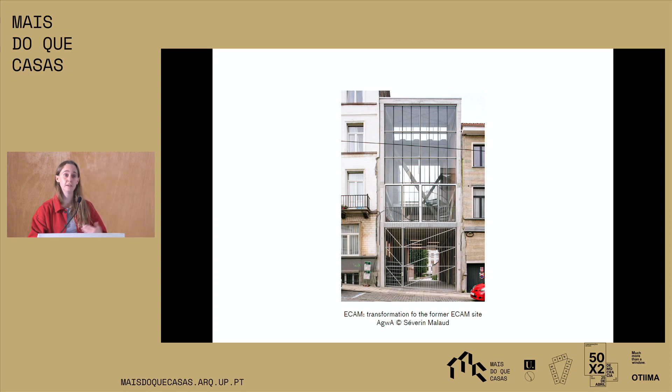Another theme is structure. We really enjoy thinking about structure, about intelligent structures. For this one, it's an old warehouse that we transformed into a house, and here the existing concrete structure had to be reinforced. We did a lot of going back and forth, but in the end we proposed to reinforce it with wood.

Which is a bit contradictory because wood is a light material and concrete is not, but in the end it works, and it gives this very architectural definition of the spaces. It defines the spaces really well, and it's always interesting to think about how the structure can also create the architecture of the space.

And then finally, CHAPEX, it's a very large scale project, our biggest one, these very large scale exposition halls in Charleroi, a city in the south of Belgium. And here for us, it's about use and appropriation, I think.

These kind of buildings are from the 70s, and they used to host big fairs in these buildings, but now they don't use them so much anymore, so the city is left with a huge building and they don't really know what to do with it.

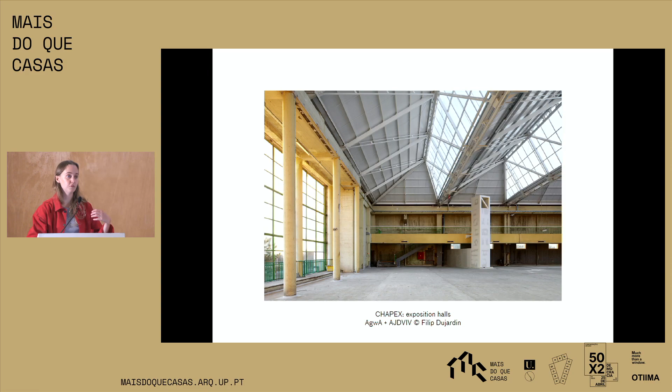So they actually asked us to demolish part of the building and construct this new passive volume that could be added to the existing building. But instead, we proposed to demolish not the building, but the facades of the building, so a part of the interior becomes an exterior space.

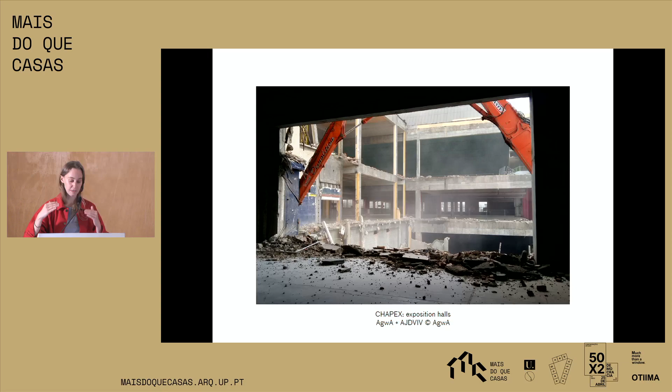Because in this way, the city that is close by can be connected with the inside of the building, and the topography can be adapted. Suddenly the interpretation of the space becomes completely different, creating new possibilities that weren't there before, but at the same time it says almost nothing has changed. If you look at the building, a lot of the original elements are still there. It's just by changing one thing that suddenly the building becomes very different.

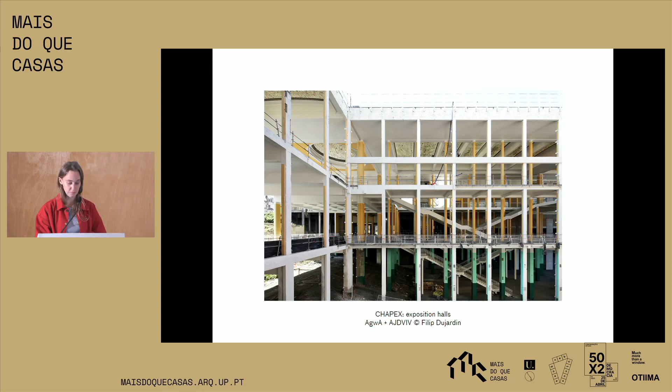As a last introduction, this is a competition we did with Muck Petzet from Germany. We lost it, but we still think the things we were talking about at the time have really been seeping through in our projects since then. The question was to create a sustainability campus for the universities in Brussels in a former military building.

The university, in the competition brief, gave us a historical analysis of the neoclassical buildings that had a lot of value and should be kept, etc. Then there were also a lot of postmodern buildings on site, and basically what they said is those are of less value and you can sort of do whatever you want, you can demolish them, etc.

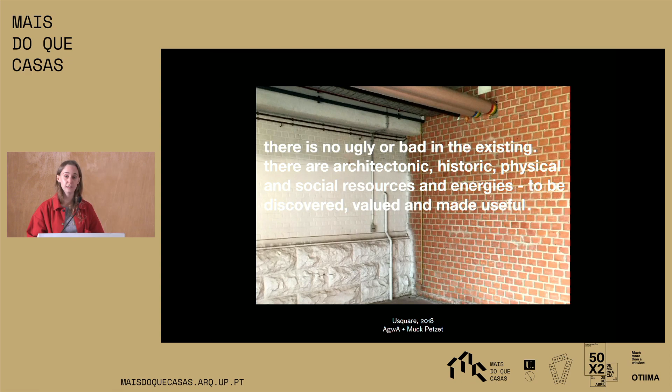During the conversations we had, we were thinking, if they want a sustainability campus, then what's really sustainable? Is it demolishing things and creating these new kind of super insulated, plastic-filled volumes? It's something we don't really adhere to, so we created these images as a sort of manifesto saying there is no ugly or bad, no good or bad in architecture, but the existing is what is there, and let's try to do something out of it and use these buildings to their full potential.

The client didn't agree.

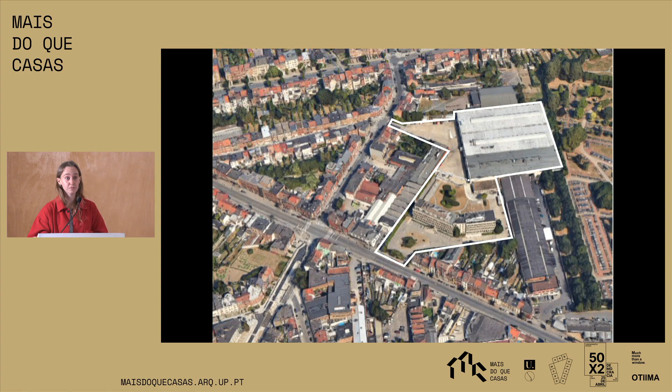So then comes the project, because it emerged out of an emergency. The municipalities that surround this site had a lot of growth in population, and they didn't have a secondary school that was French-speaking in their area, so they said we need to create a new secondary school in the municipality. They found the site of the office building, which was actually quite interesting for them, and so they started up a first competition phase, which we entered.

In this first phase, the idea was to try and open up a school on site as soon as possible, so everything had to go quickly, and it only concerned one of the wings — this one. The other one was left for the second phase. The idea was that the school could start up as soon as possible, while the construction site would be ongoing next to it.

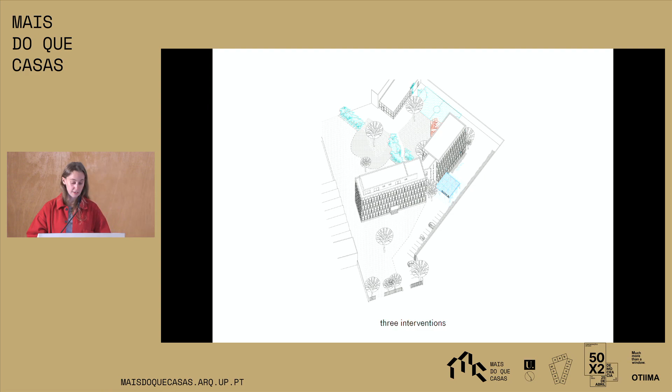So we had three interventions. The first was about the materials, the partition walls we saw in the photo. Because the quality was so high, we thought — a school doesn't have the same budget as the people who used the building before, so let's reuse these things. Also with the idea that this might be quicker, which in the end was absolutely not the case, but I still think the idea stays, we're still behind it. And so we reused all of these materials.

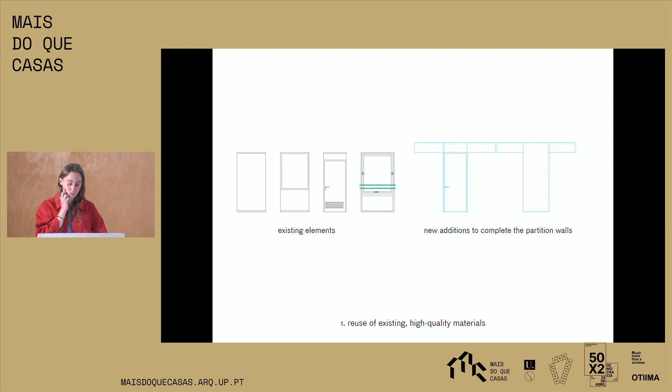Then we had to find a way to complete these partition walls, which we did using one kind of material — multiplex, wood like this — to mark where we left our traces. We made some sketches, and in color you can see the new elements we added. Everything in white is either existing or reused materials.

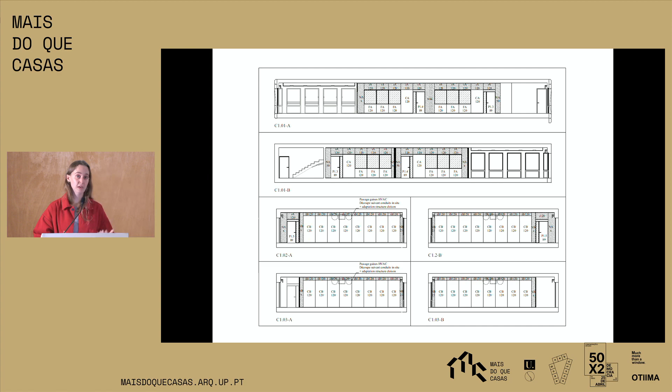And then, of course, you have to really do it. So then the work really begins — you have to measure everything, inventorize everything, be very precise, check if it's feasible. You have to take into account that when demounting, some elements might get broken, so you have to build in some safety measures.

Also for the contractor it's quite difficult, because they have to be really careful when demounting stuff. They have to stock everything, they have to inventorize everything. At some point during construction, they had a worker almost full-time moving stuff from one side to the other, because you need a lot of space to store this stuff.

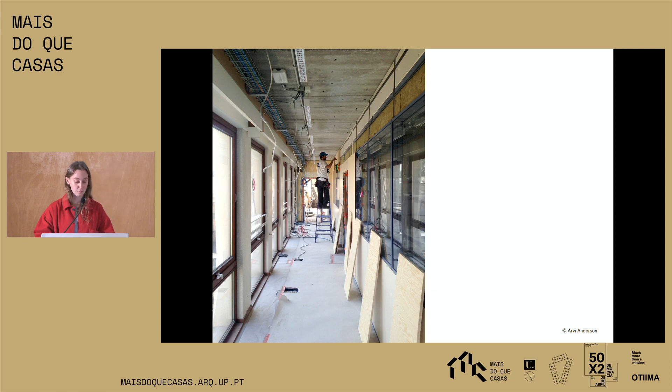So this photo from the construction site, you can see that instead of the central corridor that we used to have before, we decided to put the corridor on one side of the building. This way we suddenly have a really nice illuminated corridor, and on the other side we can create larger spaces that are more adapted to a school building.

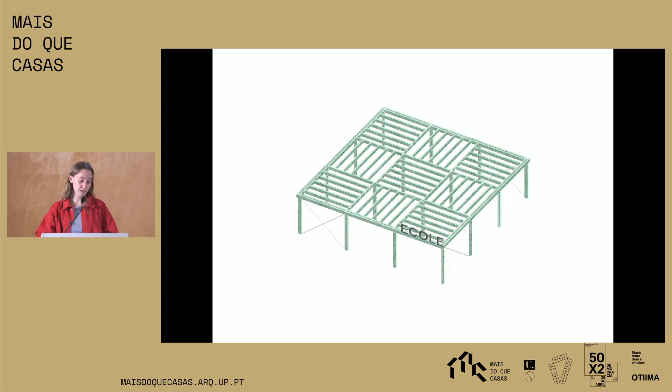And then the second intervention is a new entryway. The fact that we were only touching one of the wings of the building meant that we had to create a new entrance to the school and also mark this entrance so that it would be clear for everyone. We decided to use this really cheap hydrofuge wood because it's cheap and it's easily demountable, easy to build stuff with. In this first phase, we didn't know what was going to happen in the second phase.

It was an ideal solution to say, let's use a material which, if in the next phase this has to be adapted, can be easily taken down, used for something else, or built up somewhere else. So it's very flexible.

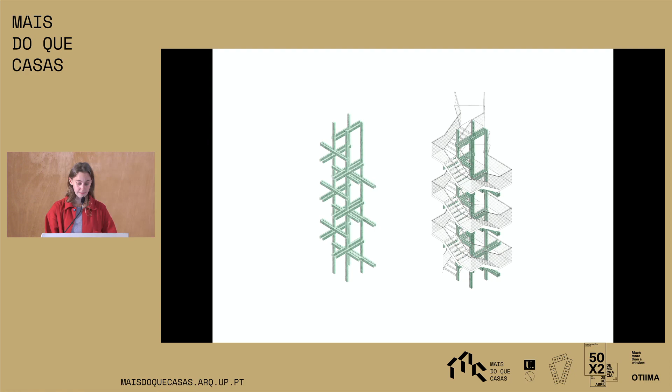And then the same thing for the staircase that you saw in the first photo. Also this cheap, demountable wood. This staircase was necessary as a fire safety measure.

Often these kind of staircases are really small, in a corner of a building, but here we decided to put it at a really important space in the school. It connects all of the corridors to the playground, and in this way it becomes this kind of central element in the building where all of the students can meet each other, and suddenly it gets a lot of value.

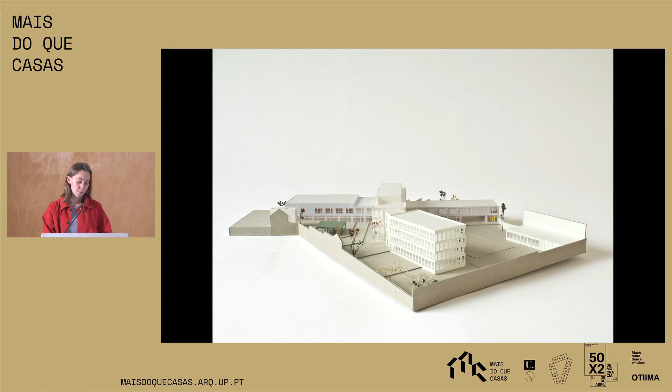And then at some point the second phase started. Another competition - we entered again and we won again. You can see in the front of the photo the wing that was treated in the first phase, and then the proposition in the back. There's a second existing wing, and then we proposed this elongated volume at the back of the photo.

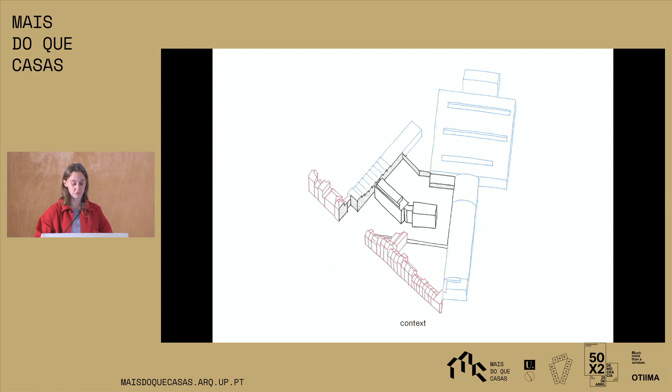So we proposed to create this volume going from the front of the plot up until the back of the plot, for a few different reasons: to activate this party wall, to keep as much open space as possible for the playground of the school, and to create some visibility to the streets, because the building was so far back from the street it was difficult to know what was happening there. By putting this volume there, it can suddenly create some visibility in the street.

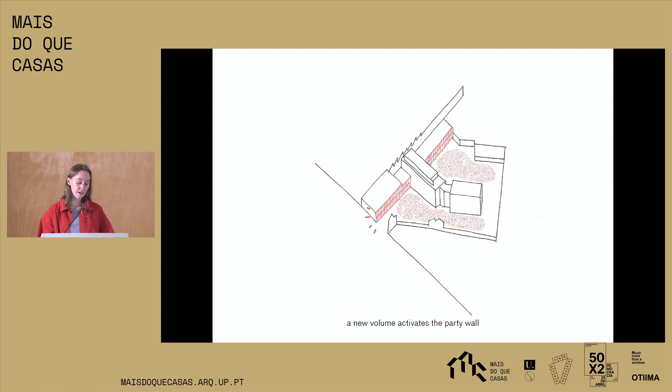Also, what we find super important is to create buildings that are readable, where people can easily orient themselves. So here as well, the volume was quite interesting to guide people to the main entrance of the building.

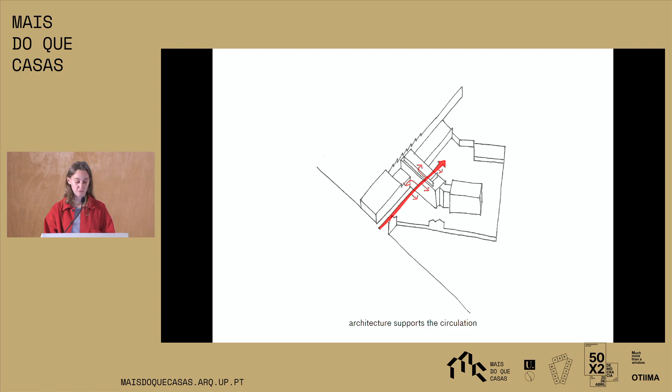And then lastly, one of the elements we had to integrate in the program was a sports hall. We put it at the front, on the street side, because this way we can separate the school and the sports hall very easily - during evenings, weekends, or holidays, the school can be closed but the sports hall can be open to the neighborhood, becoming this kind of social bonus given to the neighborhood.

The construction site took place when the school was on site, which was quite difficult.

So we had to think about this kind of musical chairs together with the school and the contractor, to see at some point the school would be there and the construction site would be somewhere else, and then it would switch and evolve. Also, because it was a new school, every year 100 new students arrived on site, so the school was growing bigger and bigger, but of course the construction site was also very important.

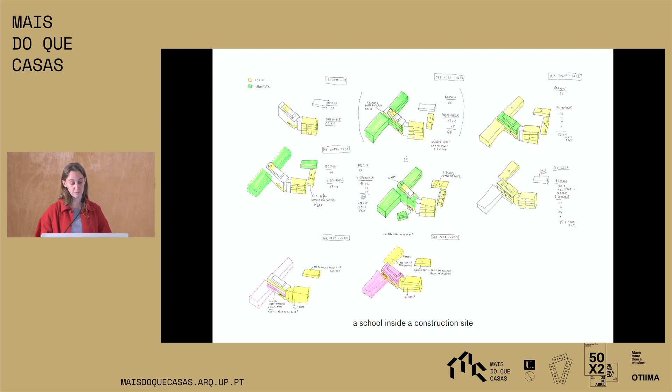In the end we managed. It was not easy for the school, but everyone made a lot of effort, and luckily it turned out really well. So an important factor was that everything had to be done as quickly as possible, as cheaply as possible, but quickness was really important.

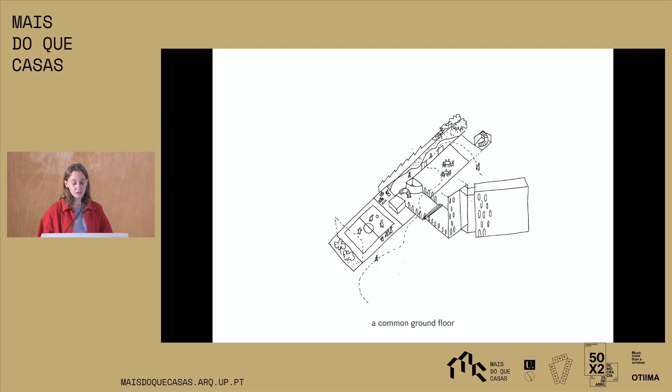So we had to think about important decisions to make in the existing building. One that was really important for us was to create a common ground floor, because the existing wing was about 1 meter above ground, which made it very difficult to create an accessible building. So we decided to demolish this elevated ground floor and create a new one at the real ground level, and at the same time create a bigger entrance to the building.

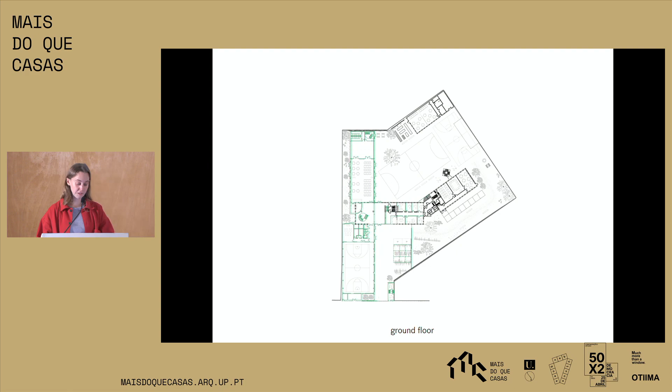It becomes this really big space where again we were inspired by the staircase we did in the first phase, because this seemed like a very important element to us in the school, so we again created this very large staircase where all of the students can meet each other.

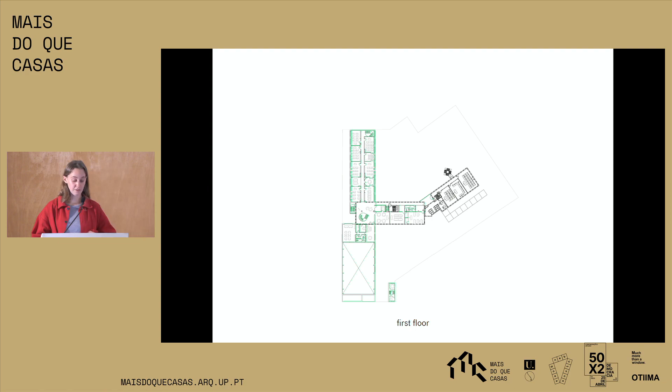So you can see here a plan of the first floor, where all of the classrooms join also in the center of the T, where then you have this large hall space with the big staircase. And then a third staircase again, to create space that's a bit oversized but adapted to the program.

And so we continued this inventory of reuse of materials. The materials were a bit different, but the tactics were more or less the same.

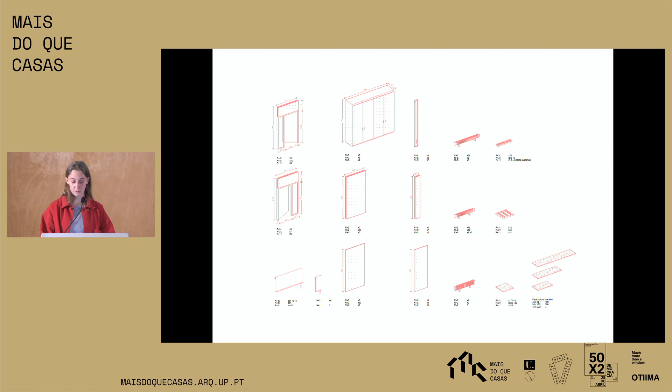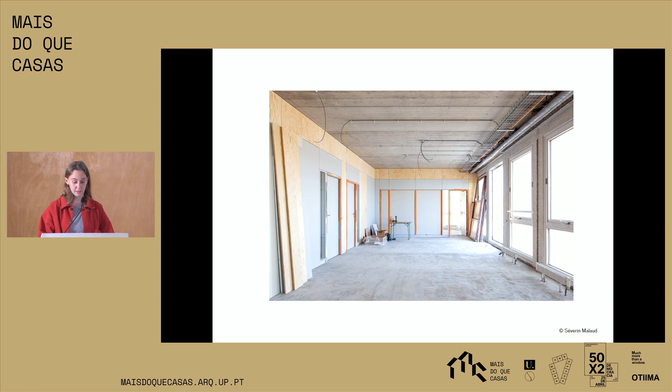So some photos from the construction site. You can see again the wood of the new elements that we added, and the gray is actually the existing materials that we reused.

So, of course, working with existing materials means you don't really have the choice. You have so many elements in this color and then so many in that color. I guess some people might find it annoying that there's no coherence, but I think this actually adds to the character and identity of the building, because this is what the building used to be, and we reused it in a different way, but it's still showing the history of the building.

And then a second project I wanted to show you is not a typical architecture project. It's a conceptual study—we handed it in officially on Monday, so it's a recent project. It's a study with the aim of thinking about the future of a housing block.

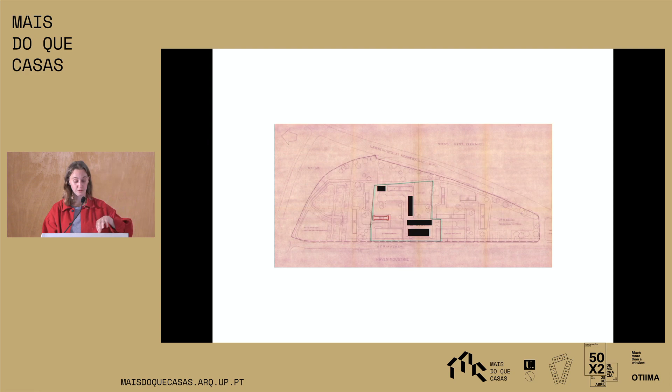Then bit by bit, the industry took over and took away all of the leftover space surrounding these blocks.

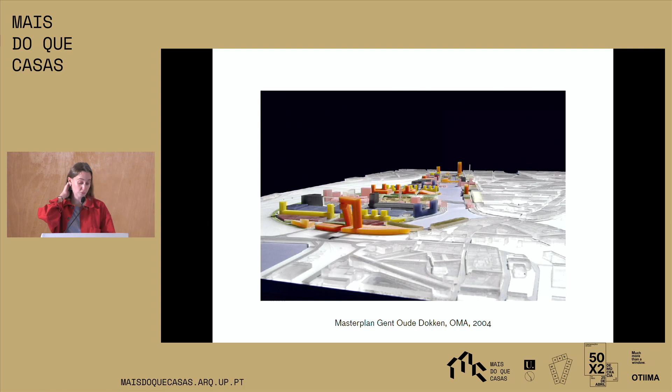A master plan was made by OMA a while back to think about redeveloping this space, and a lot of large-scale projects were proposed and are already being built now, which means things are changing around this building. So it's a moment to think about its future.

This was one of the reasons this conceptual study came to take place now. It's a question that came from the city of Ghent and the region of Flanders, really to think about what we can do with this building.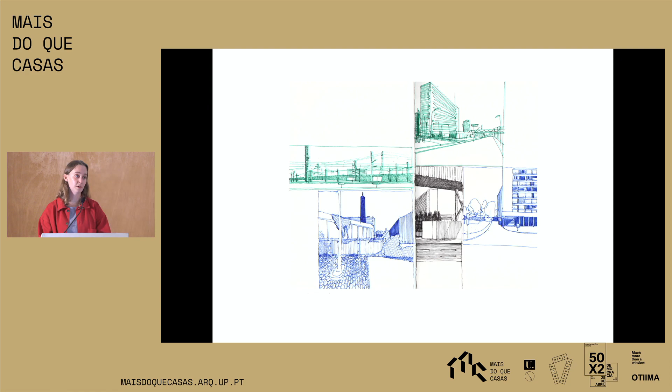There's this context that's rapidly evolving, and at the same time the building, a post-war building, is in urgent need of renovation, with the complexity that the city is not the owner. It's a privately owned building, with 224 apartments and about 200 owners, which makes it really difficult to do anything with it.

So we focused the master plan for the renovation of this building on three axes: energy transition, safety, and comfort of living.

As I said, it's a building that's visible from a lot of parts of Ghent, which means it's quite known, but it has more of a negative connotation for a lot of people, because a lot of poor people live there, and a lot of people think it's a really ugly building. But at the same time, we find it has a lot of values as well.

I think the placement is super interesting, and I would argue it has the best view over the city of all of Ghent.

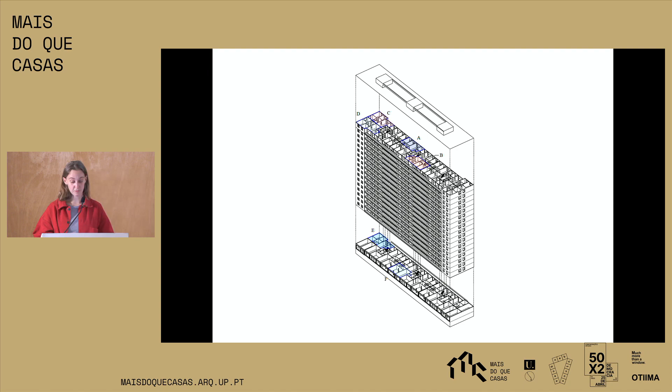Also in the organization of the plan, there are only a few types of apartments, and they're organized super efficiently. There's almost no space that is lost, and it's quite compact, but very qualitative. So the sequence of the space is really quite nice.

And also the green space around it has a lot of potential. It's not used that much at the moment, but green space is hard to find in Ghent, and this one is really of a high quality.

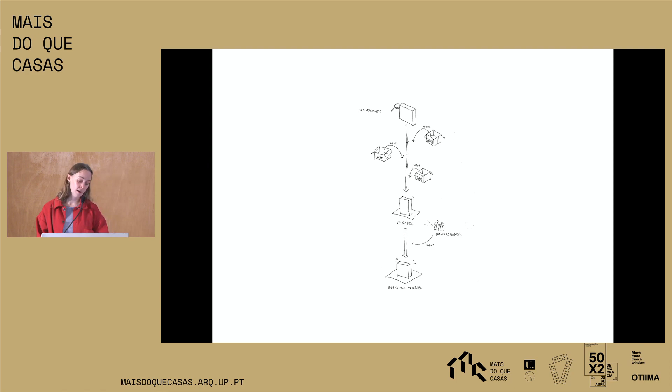So what we did is we wanted to set up a participative process with the inhabitants, but also with experts from different fields, trying to collect information of where we could develop a project. So to speak with the inhabitants, we created these thematic posters where we drew these possible futures of the building, with some text balloons with statements.

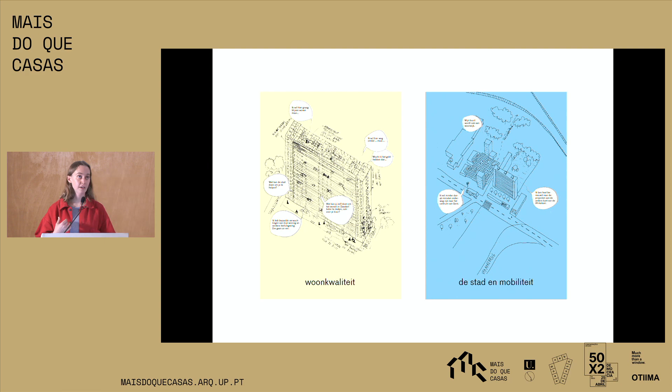That could get a conversation going. People could agree or not agree, but at least they would have something to say about it.

And these discussions, it was quite complicated because there's 200 owners in the building coming from 70 different nationalities, so it's very difficult to reach a big amount of these people. There's a lot of mistrust as well because of the history of the building, so it's really difficult to get to know these people and to gain their confidence.

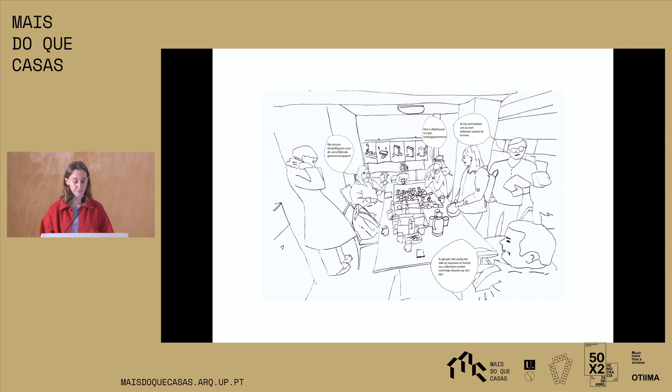We were invited as well into some of the apartments, which was really interesting, but then as an architect you really fall short, and you realize that to realize these kind of projects you need a team with a lot of other competences. It's not just an architect that can say you should do this, but you need a lot more to be able to realize these projects.

And so we did a lot of propositions. There were also some students that did some propositions. So this is a drawing of the buildings, where the student tried to map the neighborhood of these people.

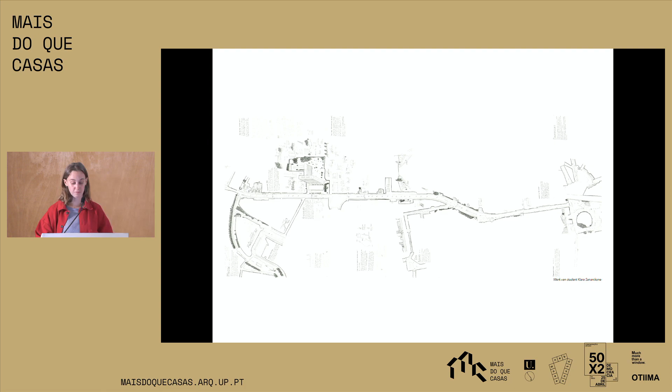So you can see horizontally is a really big traffic road, and then you see these small areas along this road, which are actually functions that they use. You can see the neighborhood for these people is super disparate, super elongated, and not this typical kind of neighborhood where you'd have everything really close by and could do everything on foot. So it's quite a contrast to what we're used to seeing.

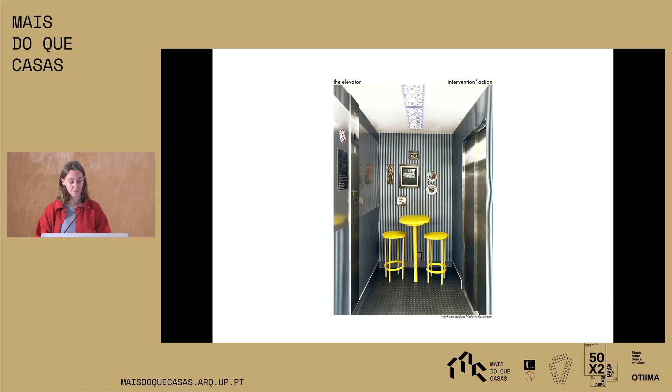Some students also proposed more like small interventions that can make a big difference - for example, gaining access to the garden, meeting space, rethinking the entry halls and corridors, access to the rooftops, etc. Creating larger balconies to benefit the fire safety and comfort of the inhabitants, and rethinking the ground floor and the entrance to the building.

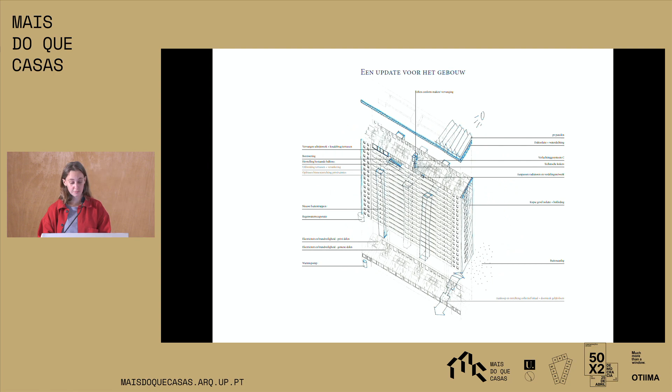And then some technical propositions and solutions, and then also thinking about the larger picture.

As I said, there is this master plan that's developing around it, and the question of the city and the region was also to think about what we can implement in these master plans so that these buildings themselves would also benefit from it, which has never been done up until that point, because it's always been looking from the city towards this developing area, but never looking from inside these buildings to what they could benefit from.

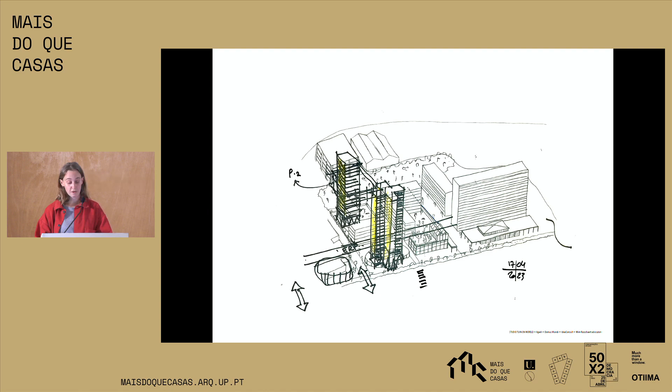So we proposed things like services that could be added, or more housing so that the neighborhood would become more lively, etc.

A few propositions and sketches. But again, of course, all of this seems super trivial if you realize that the people are just not able to pay for these kinds of works. So you can, as an architect, propose all the solutions, but as long as they don't have the money, nothing can get done.

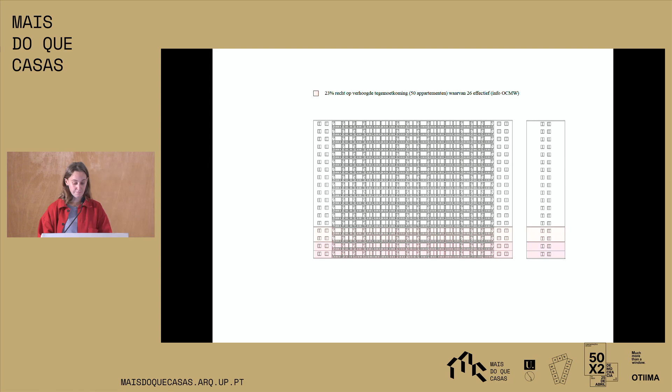And so this graph - it's 23% that you can see on the bottom - is people that receive extra benefits from the government, but in reality what it means is that these are really people in very precarious situations who really don't have anything to spare and have a hard time paying the electricity, etc. every month.

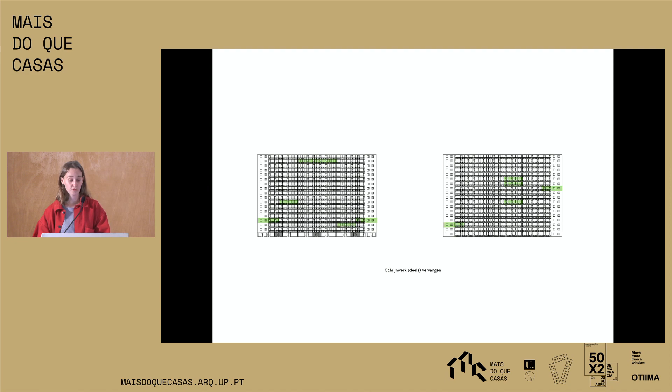Again, there were also some people who did have some resources and already renovated part of the building. You can see in green the apartments we checked that already did some works. And then it becomes super difficult to renovate something, because discussions become really difficult when someone says, I have already invested money and I'm not going to pay for anyone else's renovation. So apart from having so many owners that have to approve decisions, you also get this extra level of complexity. And then this kind of scheme explains the financial aspect.

So we made a proposition. We estimated it would cost this much to put the building back up to current standards. And of course, if you divide it by the number of owners, it's impossible for them to pay it.

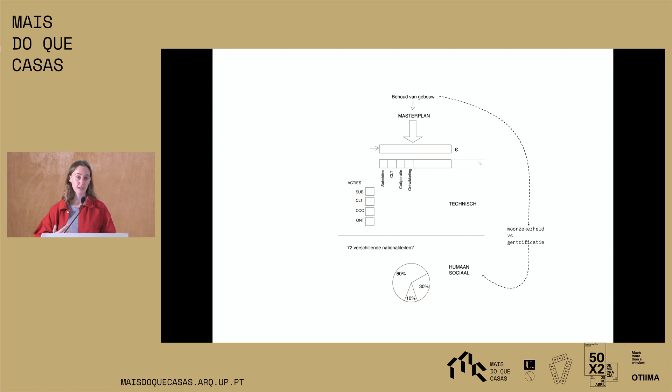You can't really work in a classical way where you ask for subsidies, because it doesn't reduce enough of the cost for people to pay it. So the approach here was to propose and research a lot of different solutions and possibilities, hoping that all the different bits could reduce the amount down to something smaller. This is the original budget, these are the different solutions, and hoping that at some point this sum becomes small enough that people can actually afford it.

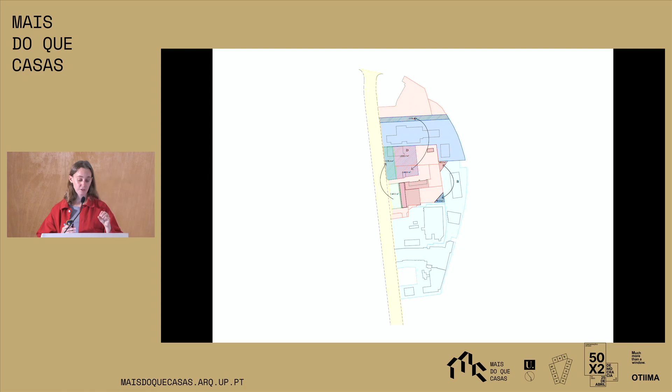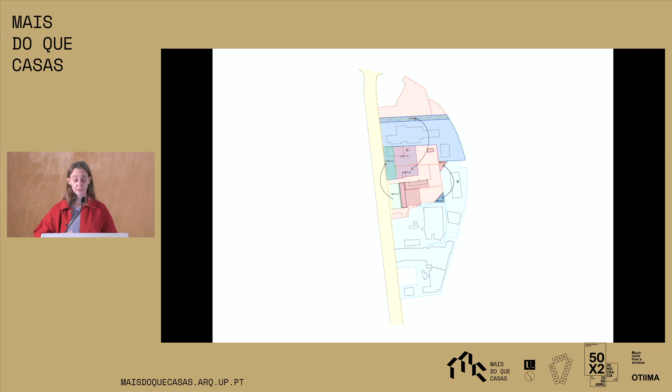There's a lot of different things that can be done. They can think about creating new developments as well as building on site, but the problem is they don't really have very useful sites. Because of the industry surrounding the building, it's a Seveso zone, so you can't build due to safety hazards. But the city has some plots around these buildings, so you can think of switching parcels with different actors on site so everyone benefits, creating an extra development plot that would generate money to invest in the building.

Another thing we proposed to the city was seeing this as a vertical neighborhood. Because if you take 224 apartments and put them in a standard Belgian horizontal neighborhood, it's a really big plot. The city invests a lot of money in making roads, garbage collection, electricity, etc., and they don't invest in these kinds of neighborhoods. By seeing this as a neighborhood, the city could also decide to invest a certain amount of money in these kinds of buildings, which would still be less money than a traditional horizontal neighborhood. So it's this change of point of view that can change the way they organize their subsidies and finances.

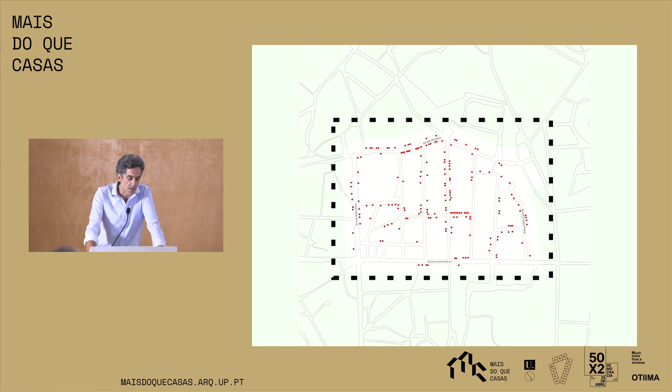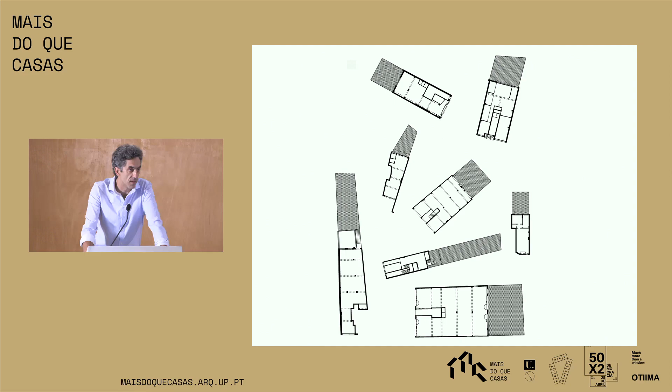We did a very thorough investigation, mapping all of the ground floor spaces and their conditions. Between Rua da Constituição, Serpa Pinto, São Dinis, and Cunha Júnior, we understood there were a lot of ground floor spaces with more or less the same conditions: leveled with the street, with a backyard, sitting in buildings 2, 3, 4 stories high with apartments on top, and abandoned or neglected.

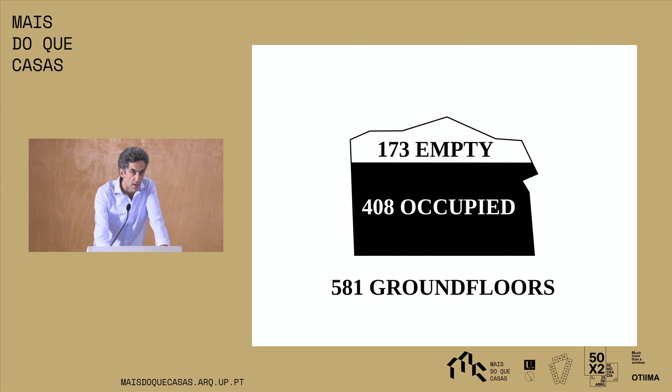So these are the stats. Out of 581 ground floors, 173 were underused, vacant, abandoned, or empty. This means 30% of them were waiting for an opportunity. 30%, making some simple math, corresponds to 22,000 square meters waiting without use.

So let's take this to the city scale. This chunk of the city corresponds to 1/50 of the city. So we would come with this figure: 1,125,000 square meters built, infrastructured, but vacant.

So we have been drinking, the bottle is not full, but it could be full. And if we fill the bottle, and divide the number of square meters by the average square meters of a 2-bedroom or 3-bedroom apartment, we could build over 15,000 2-bedroom apartments or 12,000 3-bedroom apartments in less than a year period.

This represents 62,000 new residents that could come to the city center and use spaces that already exist. More sustainable than this you cannot get.

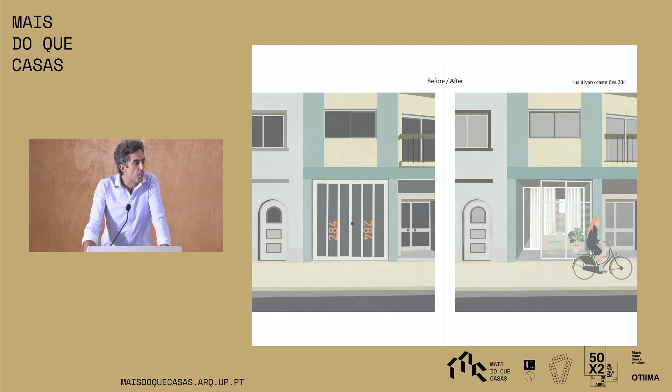But we had to illustrate this to show people what we meant. So we started making illustrations of how the ground floors look today on the left-hand side and how they could look on the right-hand side.

We did one after the other, and we showed that the gardens could be visible when they are on the side, how to deal with privacy issues, entrance issues, car parking or bicycle parking issues, and the transparency and light that corresponds to a safer street contribution, or the appropriation of the sidewalks, and so on.

So from the city that today looks like this, or at the time looked like this, it could become like this. And in this moment, we spoke to people, to colleagues, to clients, to people looking for a house, and they all said, fantastic, looks fantastic, great, I love it, but I'm not sure.

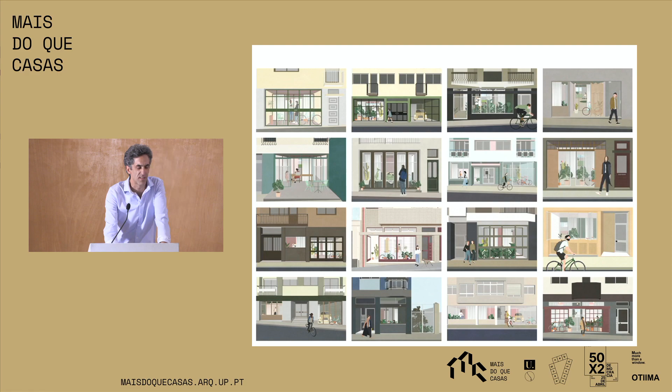So there was a lot of skepticism. Does this really work? Can you do this going through the bureaucratic problems that the city will ask for? Is a ground floor house comfortable? Will I have my privacy ensured? What kind of spaces do I have inside? Do you have moisture inside? Is it hot? So we didn't have any positive feedback on this.

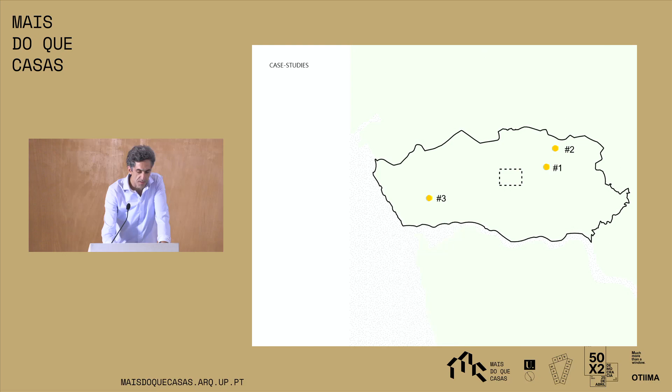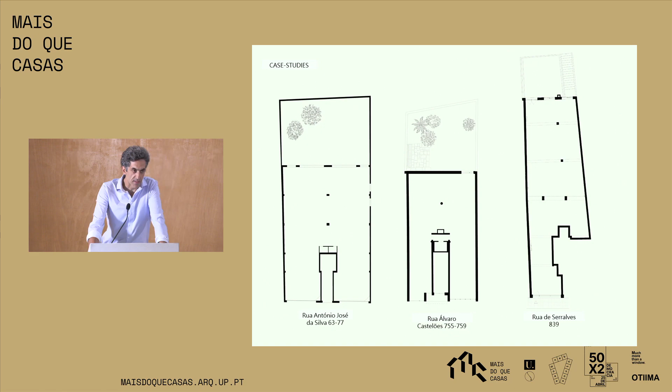So we had to go test them and make case studies. The first two case studies, 1 and 2, are next to Marquês, so 5 minutes from the metro station. For me, it's very city center, but for someone that lives in Porto, it might look like periphery - it's not, it's city center. Then the third one is in Rua de Serralves, 20 meters from the Parque de Serralves.

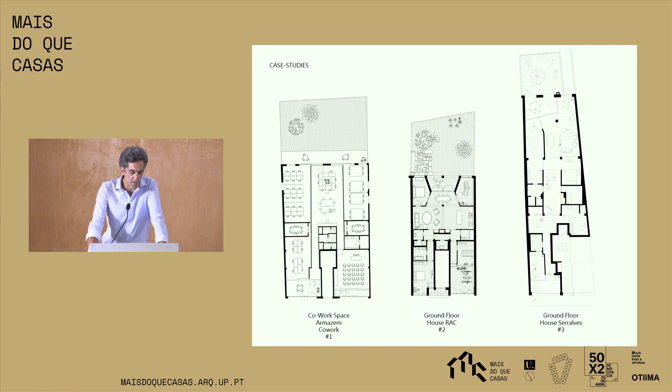The first one became a co-working space and also an office space - it's our office space right now, partially. And the second and third became houses with a garden.

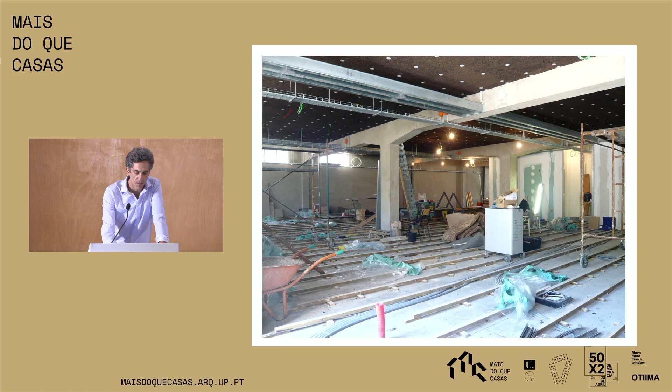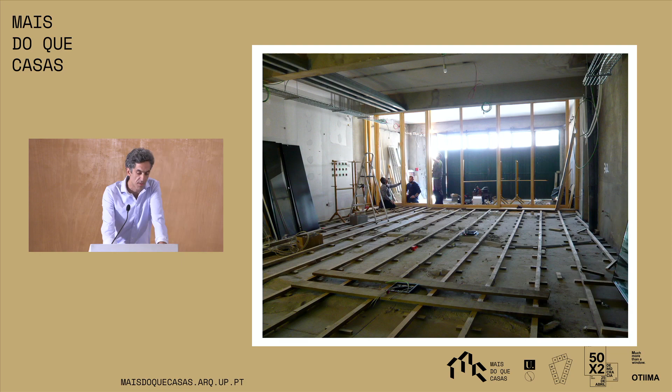Cork as insulation that was left raw, only with some white paint. We had the privilege to work with fine carpenters. We still have the amazing possibility that in most parts of Europe it's not possible anymore to work with local professionals who are extremely skillful, but can't certify their products. Who cares? Working with them, we can take advantage of passive systems like natural ventilation, reducing the amount of costs for machines and ventilation and so on.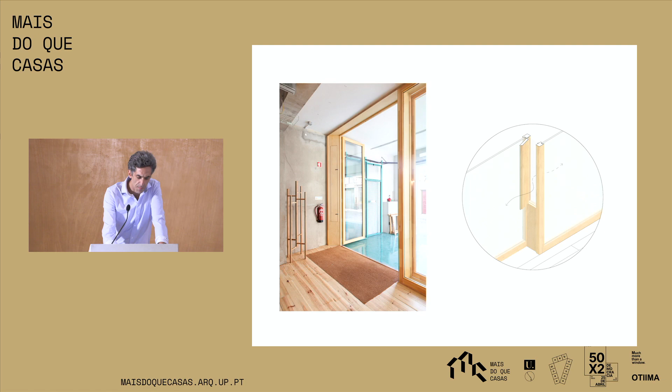The interior of the space, the cork I mentioned on the ceiling, insulating the ceiling towards the terrace on top. The entrance space and the existing metal gates with their existing opening system, only the mesh was new. And this entrance filter space allows you to leave your bicycle before you go to work, or to make a small or fast phone call before you go in, mediating the inside from the outside.

Inside, it also works as a place which is not fully private. It works as a social connector. We organize some events, some parties, and people come. In one of them we had over 300 people at the Asian picnic markets. Very nice afternoon.

Case study number 2: a house in an abandoned ground floor space. Again, before and after. The street side was closed for more than 10 years before we took it. Zero contribution to the safety of the street, zero contribution at any level, also for the condominium on top.

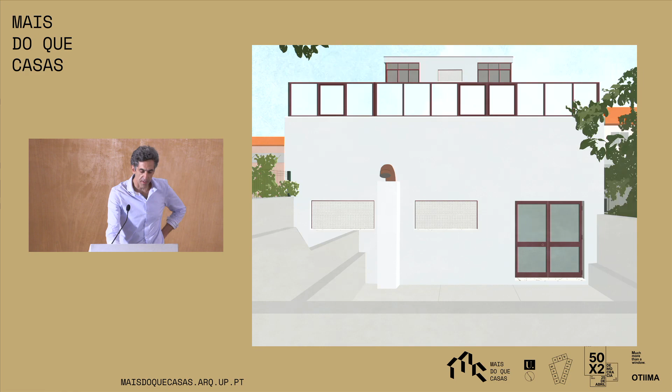Again, back to the research, we found them in the backyard always like this: cement or some roofs, cement, zero permeability in the backyard. This is us, case study number 2.

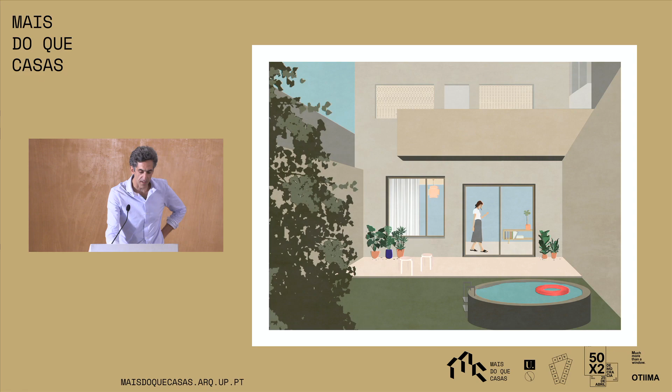And again, the vision is how these backyards could become a house with a garden in the center of the city, not in the periphery 15 minutes away by car, but 5 minutes away from the metro station. So this is us, case study number 2.

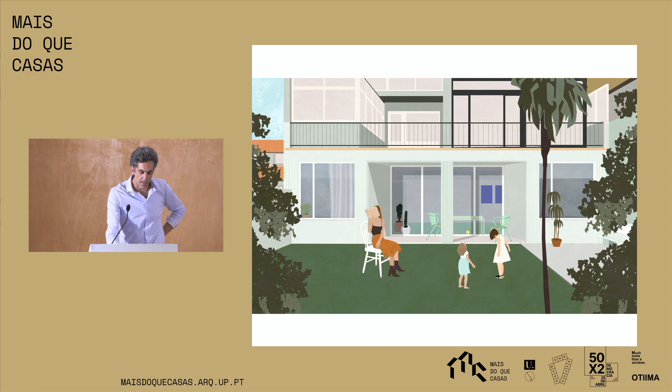This was a promise, and the promise was more or less kept. To get to the final work, there is of course a small bureaucratic delay. We have to submit the process to the city and wait some time, sometimes more, sometimes less.

So some words in different languages, because in other countries this is very normal: a temporary use, uso intermédio, Zwischennutzung. Here it's still very strange.

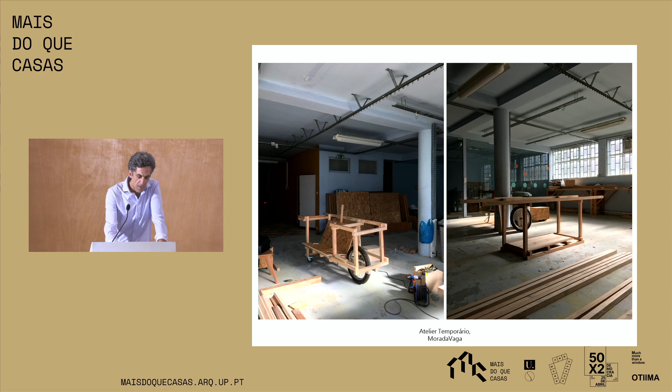While we were waiting for the city to say yes to our refurbishment request, a friend of ours asked if we knew some space he could bring his workshop into. We said, we have a space, but when we have the license, you'll have to leave. He said, that's great. They had their workshop here for one year for a highly symbolic rent a month, only to pay the expenses, electricity and water. We were happy because they were taking care of the space.

They were happy because they could also have their kids with a swimming pool in the backyard while they were working. This is also a general topic that comes with reusing ground floor spaces. Typologically we have usually big depths, so we have to bring light inside, and organize a limited facade, in this case towards the backside.

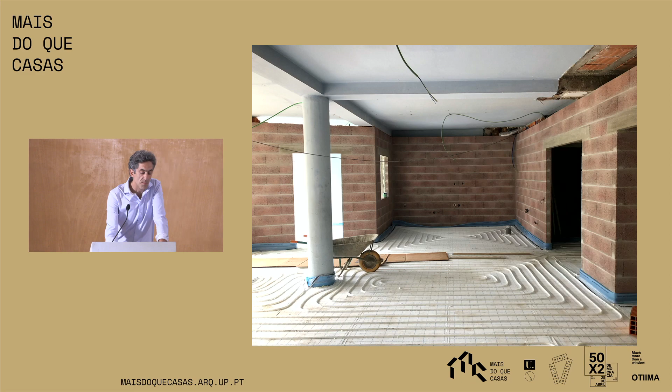The interior was against the ground, so we needed to ensure the floor was not humid, cold, or with moisture, addressing that question to make it comfortable. Again, insulation towards the neighbors in the outside areas, fair-face bricks to improve acoustics and minimize costs, a cheap palette of materials, and a GIF showing how it was and how it became.

From the inside, this filter space between inside and outside. On the other side, again, the room towards the street with curtains and timber shutters, the way you can mediate your relation to the outside. Final pictures inside.

And the backyard, a house with a garden, 200 square meters house inside, 150 as an outside space.

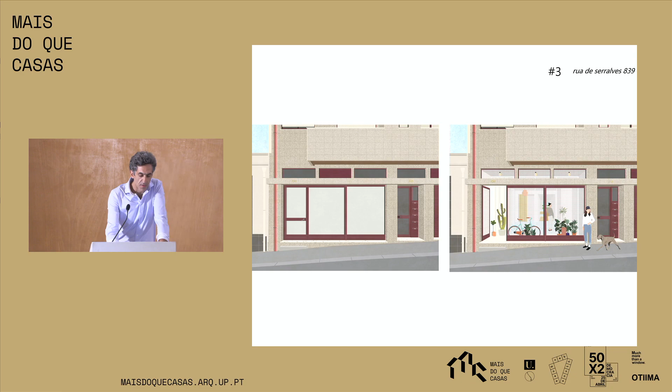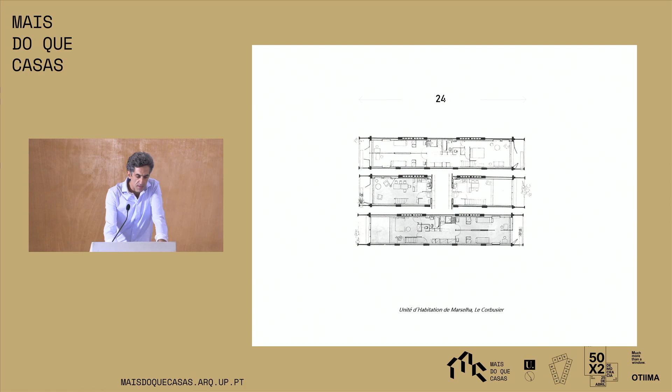Third case study, Rua de Serralves, 20 meters away from the Parque de Serralves. This is much narrower than the one we saw before, and even deeper. When we study architecture, there's always, when we talk about depth, the famous 24 meters of the unite d'habitation, the difficulty of organizing things in the depth. Well, in this case, we didn't choose it. It was 30 meters.

The section allows you to understand that in this case we had a garage, common garage under the ground floor, and the 3 story apartments on top.

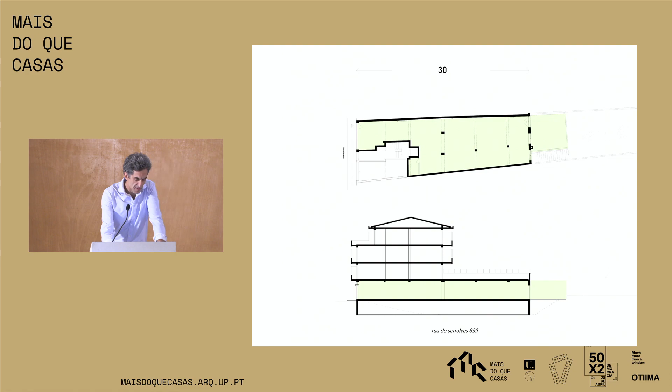Again, we had to somehow structure the depth of the space, otherwise it would be very difficult to live inside such a space. So we needed a filter space to welcome you, to allow you to move away from the narrow sidewalk, to drop your bicycle, and to leave your umbrella. A street side room, again with curtains to mediate your relation to the outside.

It could also be an office space with a side entrance directly to this filter space. Inner space in the very middle of the building can be a playroom, an office.

And then we needed some typological element that could lead you from the front to the rear, so we introduced this atrium space. It's not a corridor, it's a very wide corridor defined as a room that can be used in different ways.

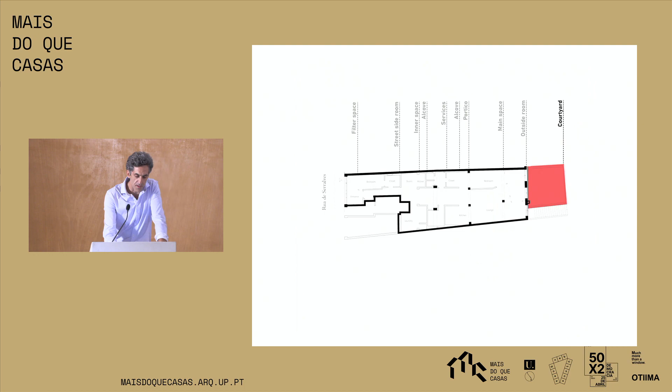And then, of course, 30 square meter private courtyard, and then more or less 200 square meters common condominium garden that is also up to you if you want to use it.

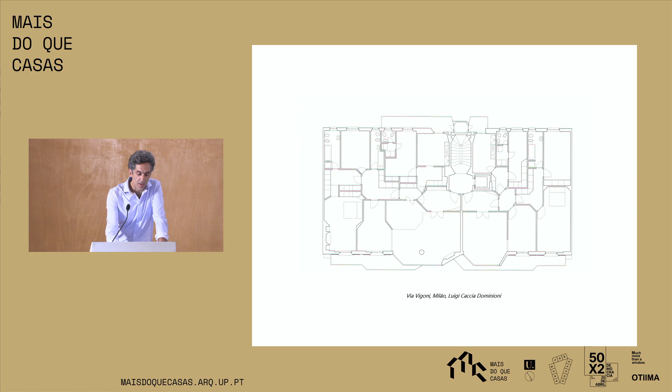Again, a reference talking about typology and geometry, and this project showed us how geometry can be helpful to emphasize the relation between inside and outside, and also to create transparency between internal rooms so that you can maximize the amount of light that comes from a limited, narrow facade.

Another general topic on these ground floors, the reuse of elements. We saw before on case study number 2, this back facade as it was, we had to demolish these parapets so that we can get more light inside, and this is how it became. The parapets were made out of granite, and this was used to make this paved area as we saw.

The metal gates, as I said before, are the same, simply reused by the change of the corrugated metal sheet. While we were building the co-working space, there was the demolishment of a building next door, and we saved some doors and used them for the toilets.

We also did that on case study number 2. Cristina Guedes was visiting that case study number 2, and after that she called us and said, I'm making a project in Avenida dos Aliados. They are going to demolish hundreds of doors. If you want to go by and save something, I know you are interested in this, go for it. And we went there.

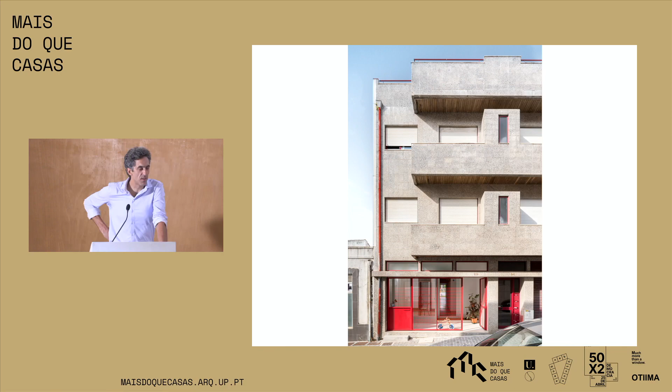The neighbor—and this is the life of an architect—a very nice guy, once stopped me when we were almost finishing the works. He was a bit puzzled, and I understood he was concerned about something. He said, you know, we like you, you are doing your work, but I saw the facade, the gate, and it looks like a hen house.

We will never please everyone. Maybe he's right, and it's not beautiful. We use it for the reasons I described, and we see some qualities in this. Maybe there's another way of doing this, but it's proven to be helpful in different situations.

To finish, these three projects are absolutely meaningless. They are impactless. If we go towards a large scale, if we transform this into 1,000 ground floor projects, then they can modify the genetic code of the city.

I agree with Inês this morning. She said we think it's better if we have bigger plots and bigger projects to have a stronger impact on the city. This is one way of doing this. The other way is to multiply small-scale projects and to transform the genetic code of the city.

So putting a bit of reuse, addressing soil permeability, making open facades and safer streets, dealing with temporary use for those that cannot afford expensive atelier spaces, and using a social connector—I think we can change the DNA of the city.